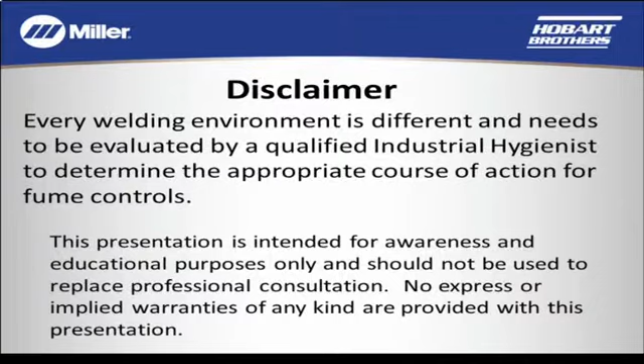So I have to have my standard disclaimer here. Every big business requires it. Basically what this says is just every welding environment is different, and there's no one-size-fits-all approach. An industrial hygienist is really going to be your greatest tool in helping decide the path that you take to mitigate weld fume. But this presentation should give you some ideas to hopefully start from.

So basically there's three big regulating and advisory bodies. There's the ACGIH, which is the American Conference of Governmental Industrial Hygienists, and what they do is they look out for research, and they make recommendations based upon the research that they find. I'm not sure how many of you are familiar with their current notice of intended change with manganese, but that's a recommendation. Then there's OSHA. Obviously, pretty much everyone here is going to be familiar with them. They create and enforce regulatory standards. And then there's NIOSH, who conducts scientific research, develops guidance, and authoritative recommendations.

So this is just for total weld fume overall. OSHA currently does not regulate weld fume as a whole. Now that doesn't mean they don't regulate weld fume, they just regulate it through its constituent elements singularly. They have different levels set for different elements, such as manganese, nickel, things of that nature.

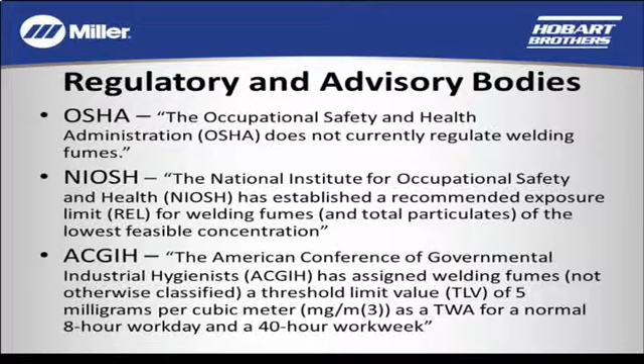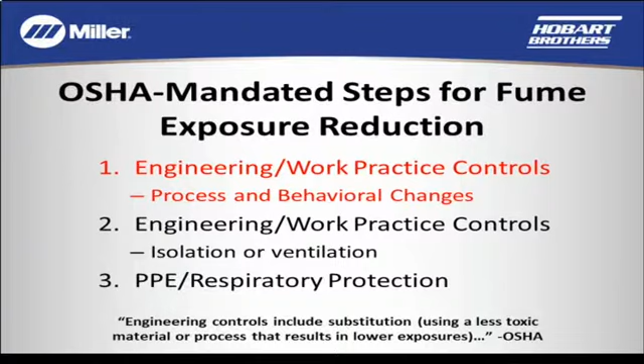So OSHA has kind of mandated some steps towards reducing your weld fume. It's kind of broad, but it essentially breaks down into these three steps. Your first step is engineering and work practice controls, which fall into process and behavioral changes. And then you have engineering and work practice controls again, but that's more isolation and ventilation. And then you fall into the PPE and respiratory protection. My friends from Miller earlier already discussed a lot of the ventilation and things of that nature, so I'm going to stick to the process and behavioral changes for this presentation.

The first step, obviously training. It seems very simplistic, but it's a very easy and cost-effective way to just initially reduce your weld fume concentration that's in your welder's breathing zone.

Typically they'll take a collector and they put it right there in the welder's breathing zone. If you can get your welder to keep his head out of the weld plume, obviously they're going to collect a lot less fume there. So, I mean, that's one way to go. Advising your welders how to position themselves so that the dust and particles don't accumulate inside the welding hood. Also following instruction on manufacturer's recommendations for operation, as well as instructions on MSDS's and AWS's Z49.1.

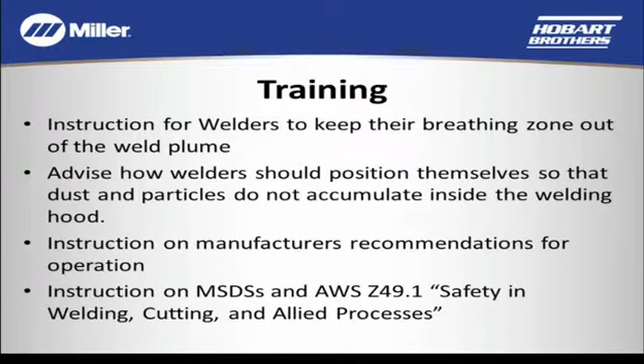So I want to go a little bit into sampling and reporting. Air sampling is typically completed to a method that's NIOSH 7300 type. It utilizes a 0.8 micron mixed cellulose ester filter, and the results are a time-weighted average. Now these are reported in milligrams per cubic meter.

And what that means is they send it out, it goes through, they dissolve the filter actually in acid, and there's a really long name that I cannot pronounce, inductively coupled plasma spectroscopy or something, that they analyze for the specific elements and determine the weight in milligrams. And then the air pump that they use pulls in so much air, and they figure out how many cubic meters of air comes in, or they've pulled through that filter, and that's where they come up with that milligrams per cubic meter.

Now manufacturers such as Miller, Lincoln, Hobart Brothers, we can't do that because every application is different. So for example, one welder in this room is obviously not going to have the milligrams per cubic meter that 40 welders in this same room with a higher arc-on time might have. So how do we quantify that to know whether we can offer a lower fuming solution or not?

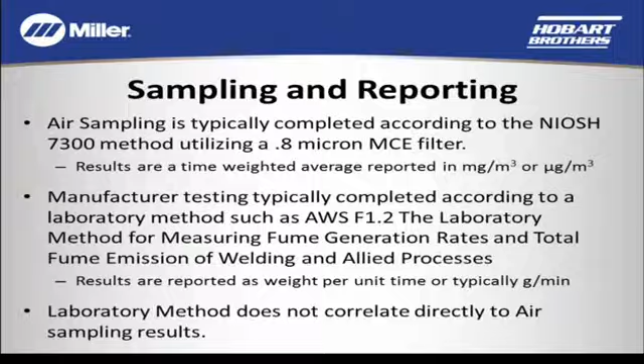And what we do is we follow testing that's completed according to a laboratory method. AWS F1.2 is the laboratory method for measuring fume generation rates and total fume emissions. These results are typically reported as grams per minute, and that's what I'm going to be referencing throughout the presentation. Now, while that doesn't correlate directly to milligrams per cubic meter, you can see obviously that if you can reduce your grams per minute of particulate, that obviously you're going to reduce your total weld fume.

So first off, we have weld process selection. Globular transfer mode is typically not the most stable of processes, and it's undesirable in applications where weld fume is a consideration. Because of this, shielded metal arc welding and self-shielded flux cores are generally not the most desirable when considering a process where fume is a concern.

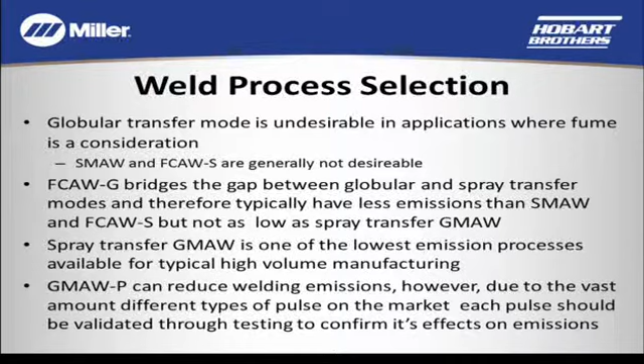Gas-shielded flux core bridges the gap between globular and spray transfer modes, and they typically have less emissions than the shielded metal arc welding and the self-shielded electrodes, but they still aren't as good as the GMAW process in the spray transfer mode, which is solid wire and metal core type applications.

Now, one thing I get a lot of questions about is pulse, GMAW pulse. It can reduce your fume, but to make a blanket statement is impossible on that. Many pulses nowadays are adaptive, such as Miller's AccuPulse. I think Lincoln has something like that. And because these pulses adapt to changes in the welding environment, you don't know what's changing inside that machine, so quantifying the effect that it's going to have on your weld fume is impossible.

On top of that, you can't just make the blanket statement because there's a number of manufacturers out there that offer pulse, and they all have their own proprietary waveforms, and no one really knows how they're going to affect their process without being able to look at these proprietary waveforms.

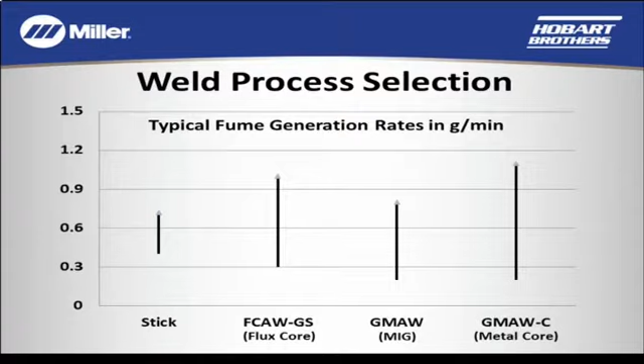The second consideration is material condition. This is one that tends to get overlooked a lot, but blasting or grinding to remove mill scale prior to welding can significantly reduce your weld fume. Also cleaning base materials to remove greases and oils. If you order a cold rolled material, typically they'll have some sort of rust preventative grease or oil on it. That can affect your weld fume and cause it to go up.

As you can see in this graph here, the blue is the blasted material, and that's significantly less than the hot rolled material, which has heavy mill scale on it.

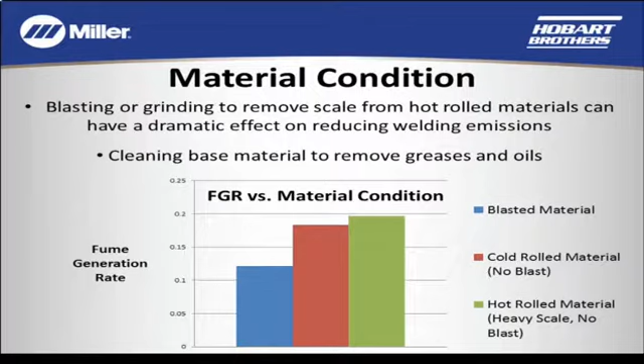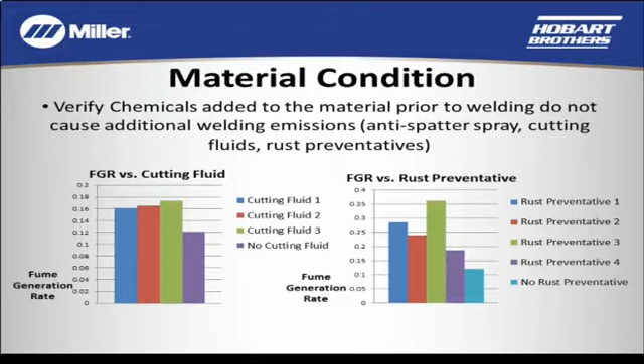Now, you also want to verify the chemicals added to the material prior to welding. As I mentioned, oils, greases, things like that are not good for it. But what many people overlook are cutting fluids, rust preventatives, things like that. Here you can see more graphs with a study done that shows various different cutting fluids versus no cutting fluid, and various different rust preventatives versus no rust preventative.

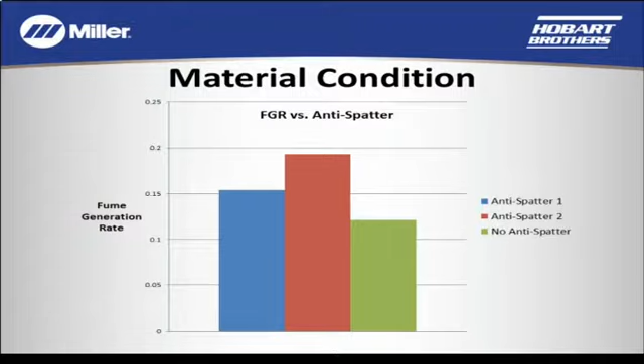And then here it goes on to show that different anti-spatters can also have effects as well. So these can be considerations when choosing things outside of your welding process that you can look at that may help potentially reduce your weld fume.

The next consideration is shielding gases. Argon CO2 mixes are more desirable than CO2 in flux core applications where welding emissions are concerned. Generally, CO2 is not the most desirable for welding fume in your shielding gases. So you'd like to use richer argon blends.

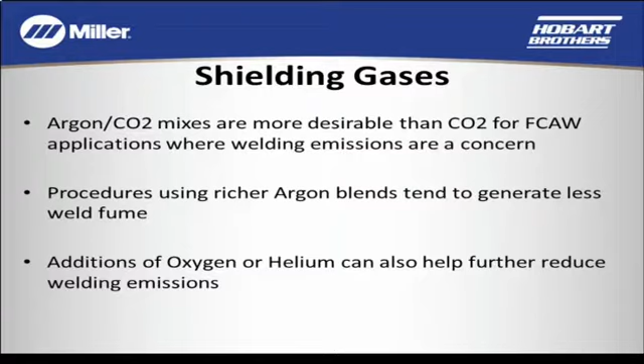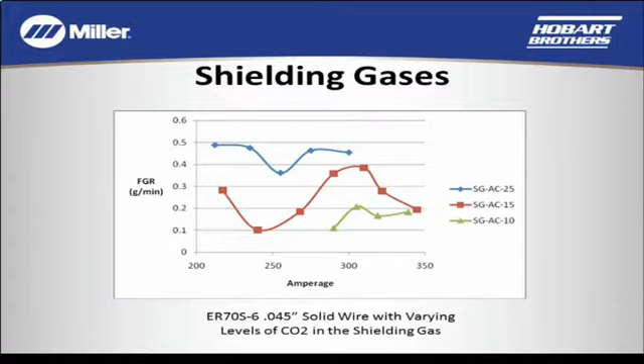So here's just a graphic. This is solid wire showing different fume generation rates for different shielding gases. As you can see, the 9010 falls far below the AC25 and the AC15.

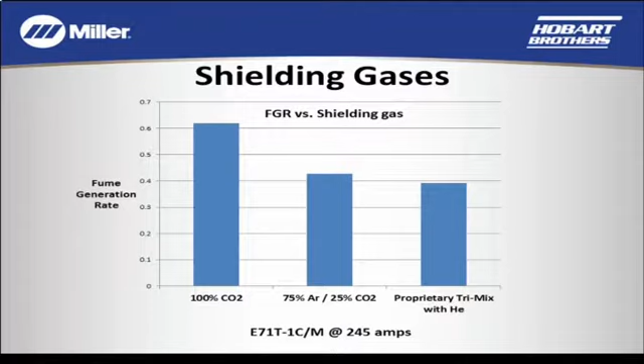And this is just another graphic showing different shielding gases with a flux core wire. You have 100% CO2, which is showing the highest, and then you have 75% argon, 25% CO2, which is significantly better, and then you have a proprietary trimix that contains a small amount of helium, which has also helped reduce weld fume slightly.

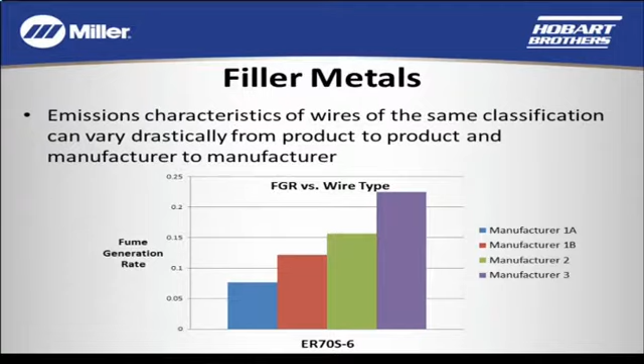The next consideration is filler metals. Emissions characteristics of wires of the same classification can vary drastically, whether it's from product to product or manufacturer to manufacturer. As you can see here, you have manufacturer 1A and 1B. Those are actually the same manufacturer, but those are different products in that same ER70S-6 classification. As you can see, they vary pretty significantly, and then manufacturer 2 and 3 vary even more significantly from that. So not everything is equal in filler metals.

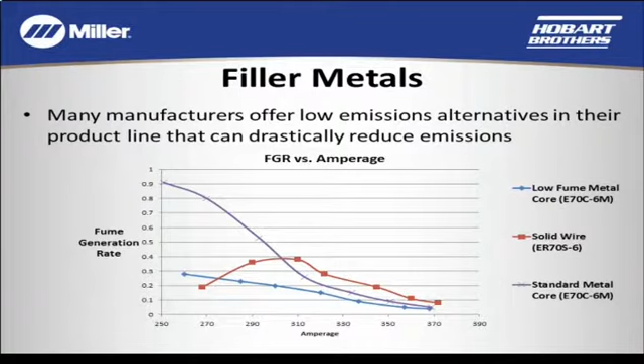However, many manufacturers offer low emissions alternatives in their product line to drastically reduce emissions. The blue line there shows a low fume metal core, which is actually producing lower weld fume than solid wire, but then you see your standard metal core can produce significantly more fume than solid wire. And that's just looking at a couple different wires there. You could cover that entire graph with different manufacturers and products, and they would all vary significantly.

Diameter also comes into play. The diameter should be chosen so that the desired amperage range is towards the top of the operating range. As you can see here, these metal core wires, this is the same product, different diameters.

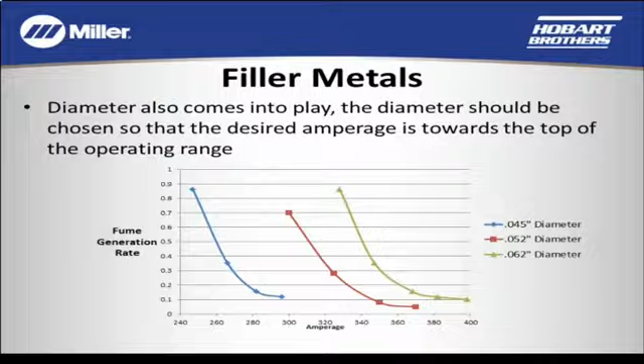It drops significantly towards its operating range. 045 is typically the top end, considered around 325 amps. Here you can see it drops around 280, and I've seen it'll keep decreasing slightly, but then you also see this with the 052 and the 062 in these graphs.

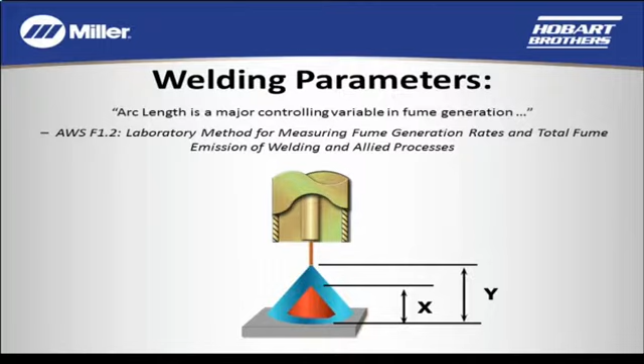So now we're going to discuss welding parameters a little bit. The AWS F1.2 laboratory method says arc length is a major controlling variable in fume generation rate.

Arc length is a function of many factors, but there's really three main ones that come into play. You have your arc voltage, your wire feed speed, which amperage correlates to, so amperage has an effect as well, but for the purpose of this discussion we're just going to say wire feed speed. And then you have your contact tube to work distance.

So for lower voltages, higher wire feed speeds, the graphic there shows X, which is lower voltages, higher wire feed speeds, and longer contact tip to work distances will give you that shorter arc length. Higher voltages, lower wire feed speeds, and shorter contact tip to work distances will give you that longer arc length.

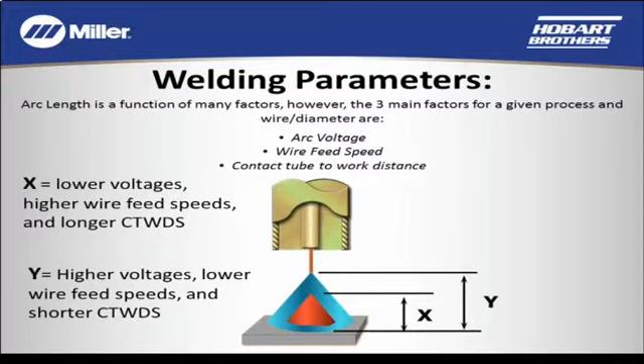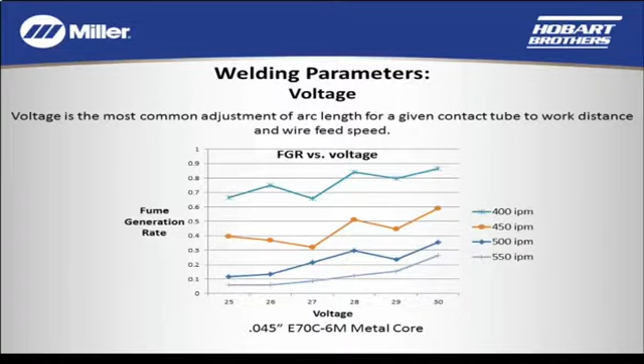And as you can see here, these are the same. We kept the wire feed speed the same for the same product and increased the voltage, which is effectively going to increase your arc length. And as you can see, the fume generation rates trend upwards.

And here you're getting into wire feed speed and amperage. If you can keep the voltage the same and drive up your wire feed speed and your amperage, you can see that trends your fume generation rates down.

And you can also see, if you were watching at weld, you could see that your arc length is going to drop significantly as well.

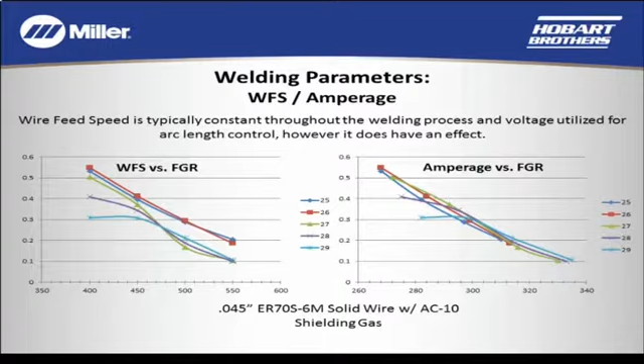And then here is just another graphic showing the different voltages and how you see the trends with the wire feed speed and amperage that drop your...

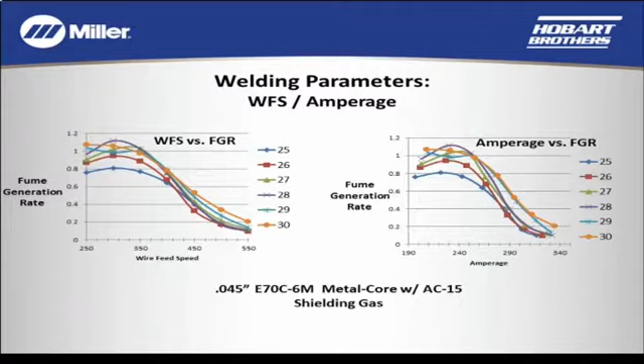Arc length as well. Now the other thing to consider is that, all of this being equal, you're feeding a lot more wire into the system at those top ends. So you're actually converting less of the wire into the fume. Your fume generation rate is less, but you're putting down more wire, so less of that wire is going up into fume.

Some weld process modification considerations. A lot of this could be tough to implement in your facility for a number of reasons. You may not be able to modify existing welding procedures. You could be bound by contract or a pre-qualified procedure, or it just may be too expensive to qualify your welders or a new procedure.

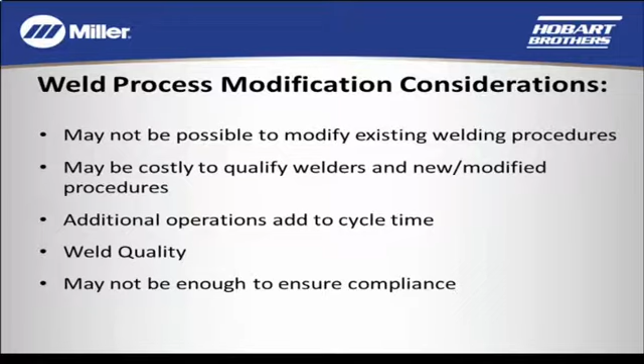You could also, I discussed the material condition, the blasting, the grinding. Those are additional operations that can add to cycle time. And then you've got weld quality considerations whenever you begin adjusting your weld procedure. And then there's also the consideration that even though you may change all these in your weld procedure to help reduce your fume rate, it may not be enough to ensure your compliance.

So it's not a one-size-fits-all approach. The welding emissions are affected by virtually every variable in the welding process. The differing environmental conditions in your applications are going to cause things to swing significantly. So your best route is to get a qualified industrial hygienist who can help you work through all of the potential solutions and find the best one for your company. They'll also help you quantify everything so that you can actually see the benefits.

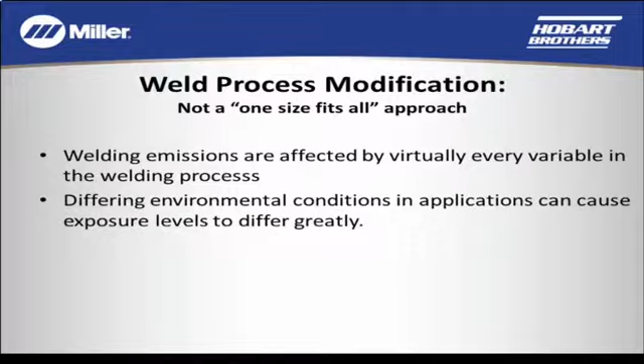Now, one thing I do want to talk about a little bit is when you reduce weld fume, it can be a bit of a balancing act. Now, I discussed earlier that OSHA doesn't regulate weld fume as a whole, they regulate the constituent elements.

What happens is when you reduce your weld fume, let's say we jacked up the wire feed speed and the amperage like you saw in that graph earlier, and we significantly reduced your fume. Amperage has an effect on manganese, and that can drive up the percentage of manganese in that weld fume. So it's a balancing act, because even though you've reduced your weld fume, you've driven up the percentage of that weld fume being manganese, so you still may or may not be in compliance with those specific elements. And so that's a consideration that needs to be given as well.